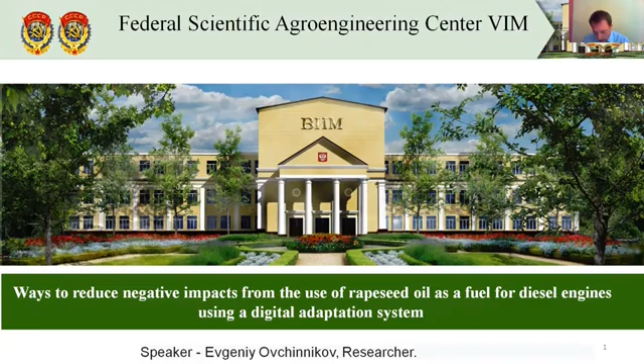Over recent years the use of renewable alternative fuels for internal combustion engines has become increasingly relevant due to both the environmental situation of the planet and fossil fuel prices throughout the world. Diesel fuel is the most common fuel used in agricultural machinery, its main alternative being vegetable oil fuel in pure form as well as in the form of various additives.

Biofuel production growth averaged 3%, 54k barrels of oil equivalent per day, less than half of the 10 year average. Growth was led by Brazil, 31k barrels, and Indonesia, 32k barrels. But US output declined by 19k barrels.

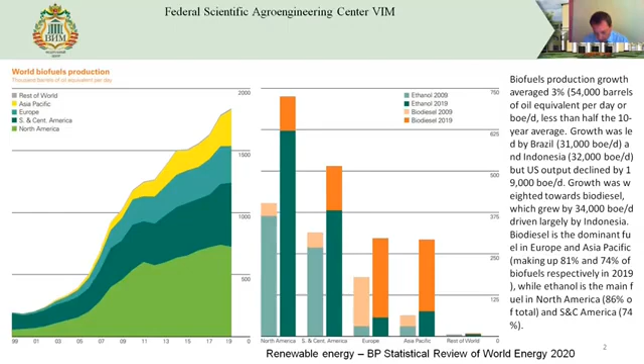Growth was weighted towards biodiesel, which grew by 34k barrels, largely by Indonesia. Biodiesel is the dominant fuel in Europe and Asia Pacific, making up 81% and 74% of biofuels respectively in 2019. While ethanol is the main fuel in North America, 86% of total, and South and Central America, 74%.

Biofuels consumption rose by 6%, 100k barrels oil equivalent per day. As with production, growth was driven mainly by Brazil, 42k barrels, most of which was ethanol, and Indonesia, 56k barrels, which was largely biodiesel. At the global level, ethanol made up 63% of biofuels in 2019.

But the share of biodiesel has risen continually. For example, biodiesel's share was 23% in 2009, but rose to 37% last year.

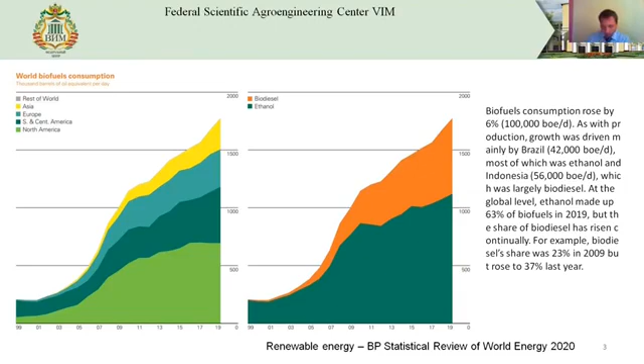Use of vegetable oil-based motor fuel is especially relevant in light of environmental safety of the engine itself, in terms of reducing the concentration of harmful emissions in exhaust gases, and efficiency resulting from fuel cost reduction.

However, there are still a number of problems that need to be addressed in regards to achieving higher efficiency, particularly when using rapeseed oil. It is necessary to ensure that it is supplied to the diesel cylinders in optimal amounts, its combustion is complete, and any probability of it getting into the engine crankcase is excluded.

Another necessity lies in preventing the formation of a solid film of rapeseed oil on any of the parts of the fuel system, as well as carbon formation on the working surface of the combustion chamber and atomizer nozzles. That later leads to a decrease in the effective flow area of the nozzle openings, adversely affecting the overall operation of the fuel equipment.

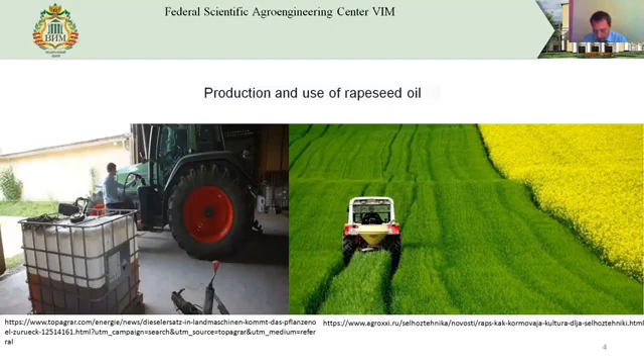To solve this problem, the authors propose a method and technical solution for operating a diesel engine using rapeseed oil as fuel in a dual-fuel system that allows up to 90% replacement of diesel fuel with alternative fuel, while preserving the engine's technical characteristics and leaving the combustion chamber and atomizer nozzles free of carbon formation.

In the test represented here, the team used the D440 engine manufactured by the Altai motor plant for agricultural tractors, combines, and road building machinery. The choice of this engine was conditioned by its wide application in self-propelled agricultural machinery in Russia.

Cold pressed rapeseed oil and nanodisperse powder consisting of silicon dioxide, aluminum dioxide, and thermally dispersed acid intercalate graphite, with particles averaging 40 nanometers in size at the most, were used as the fuel mixture.

The fuel mixture was prepared by adding the nanodispersed powder to pure rapeseed oil in the amount between 0.01% and 0.02% of the total volume of the fuel, the mixture being heated to a minimum viscosity temperature of 80-90 degrees and stirred. The team developed technical documentation for further implementation.

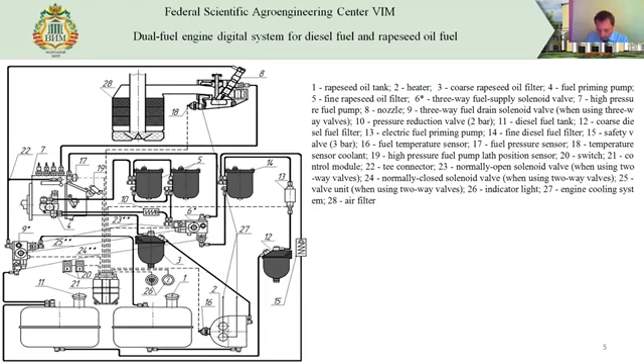The atomizer nozzles were weighed on a laboratory scale with a measurement error of 0.2 milligrams, after having been completely dried in a multi-purpose heating cabinet at a temperature of 105 degrees. Carbon formation on the working surface of the combustion chambers and pistons were assessed visually.

This picture shows carbon formation on nozzles for a 16 hour test. Left side is rapeseed oil, right side is rapeseed oil with nanodisperse additive. The test conditions for the 16 hours were cyclic, step by step modes simulating the engine's operating conditions.

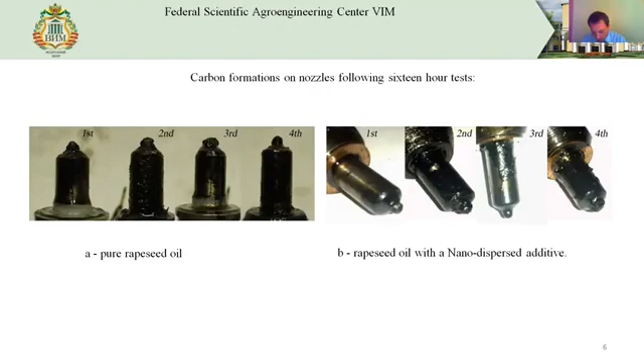As can be seen in the picture, the nanodisperse additive causes carbon formation to peel from the working surface of the nozzles. This table presents the results of assessing carbon formation on atomizer nozzles with the engine using diesel fuel, pure rapeseed oil, and rapeseed oil with a nanodisperse additive.

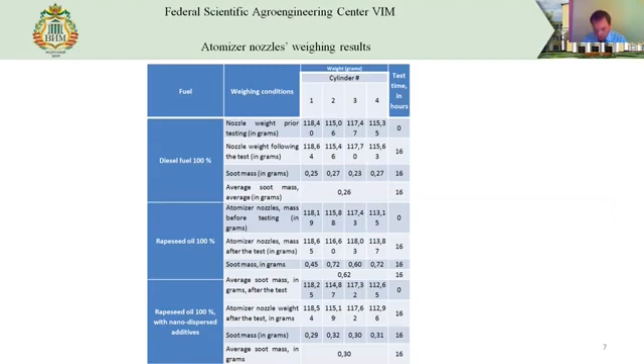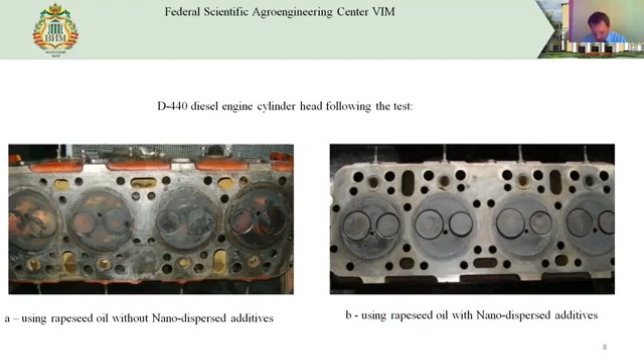This picture shows carbon formation on the ignition side of the combustion chamber, first using pure rapeseed oil, then using rapeseed oil with a nanodisperse additive. Carbon formations are practically absent. Valve plates are also clean. Insignificant carbonization on the head of cylinder 4 can be accounted for by insufficient thickness of the gasket under the nozzle.

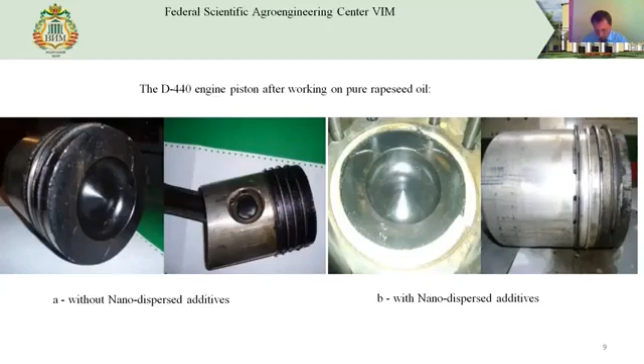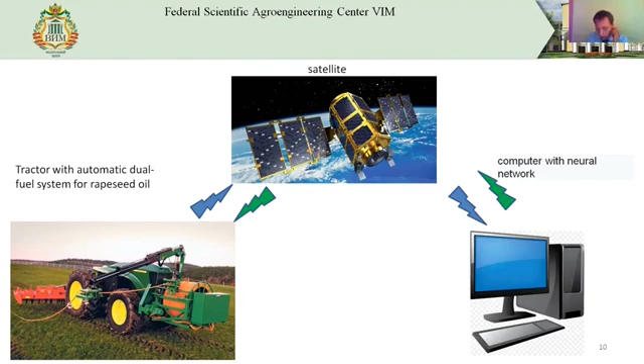An automated dual fuel digital system is provided for installation on unmanned tractors, which are included in the neural network, with which it is possible to analyze and control their work, including their fuel system. Thanks for your attention.